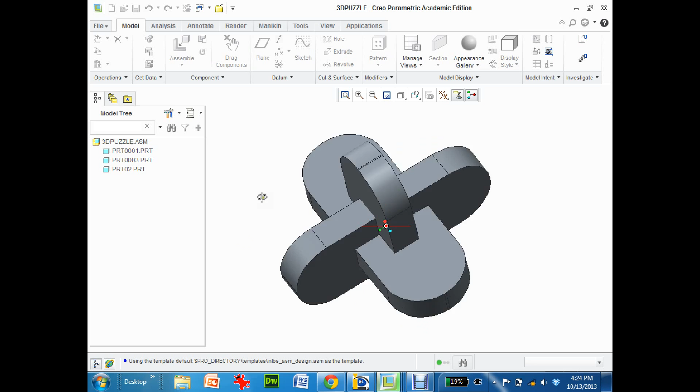This is part one of a tutorial that's going to have you create this 3D puzzle. What will end up happening at the end is you will output this 3D image in Creo to the laser engraver so it's actually physically in your hand.

To begin, we have to start off with what it's going to look like, or the dimensions of it. Here in progeCAD you can see these are the actual dimensions of each piece. So what you're going to do is go into Creo and make each piece.

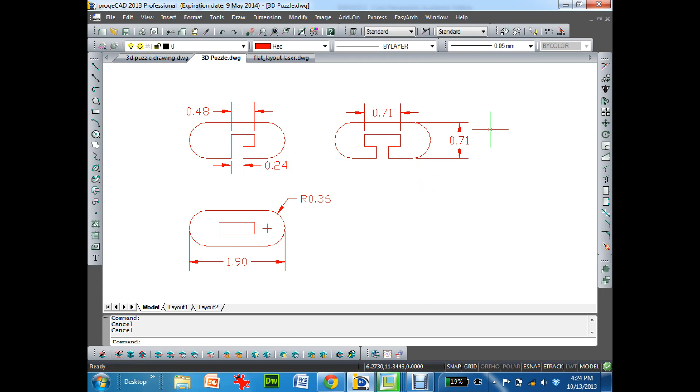Now there's a couple little tricks. To start off with, here's my first piece, and I've drawn it out, no different than any other drawing in Creo. But the next two pieces basically revolve around the same shape, so I don't need to redraw each one from scratch.

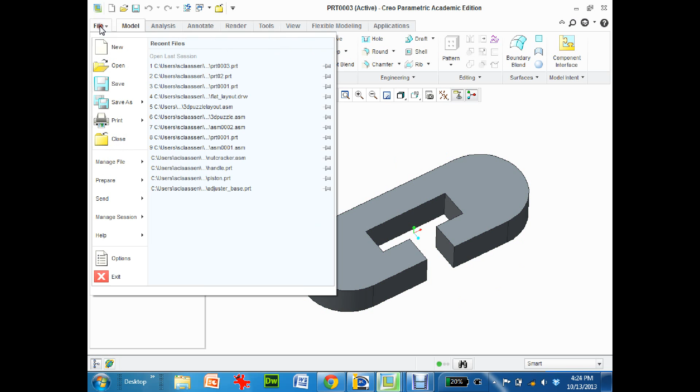What I can do is go up to File, Save As, and Mirror Part. Under Mirror Part, instead of mirror geometry only, I want to mirror geometry with features, and that allows me to modify it afterwards.

I'm just going to leave it as a default as Part 8 right now. So I click on OK, and now this is the second part. You can see up top here it's Part 8.

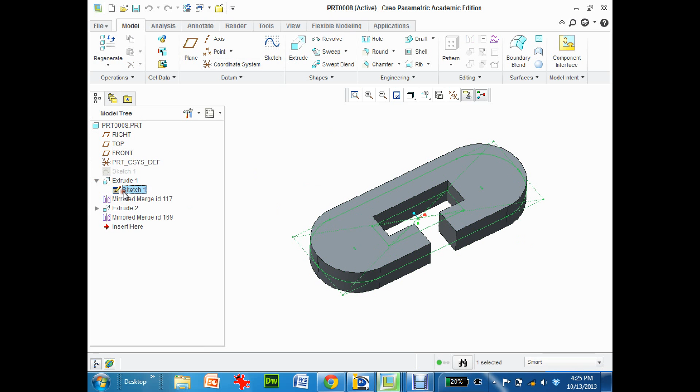Now I can go into it, hit Sketch, right mouse click, Edit Definition, and now I can go and add different features to it. So for example, if I wanted to modify the whole opening or something, or change other things, I can go and do that as well.

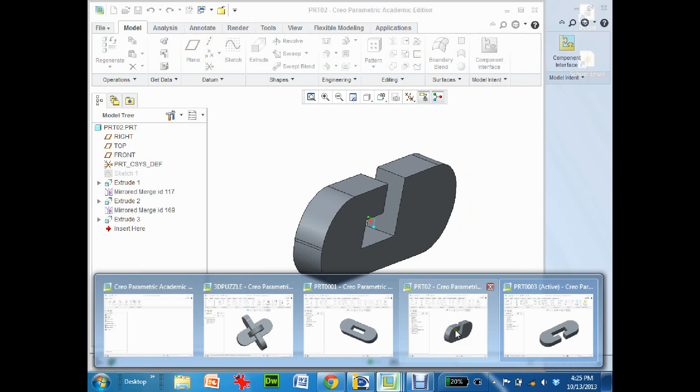So anyways, that's just one way of doing things. Once you've saved it, I'm actually going to close this one off. Once you've got all your parts, there's my first part, there's my second part, there's my third part. So all my parts have been created.

Now what I want to do is assemble them. It's pretty simple, straightforward assembly, and when they're all together it'll look like this.

Now that my model's done, my three parts are made, what I need to do is put them in such a way that I can actually get them to the laser engraver, because right now if I try to put this to the laser engraver it's going to look kind of funny.

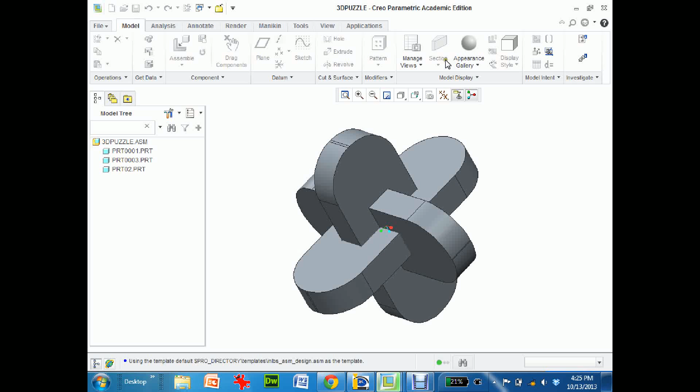So what I do is I actually start a whole new part. I take this, and from here I'm just going to start a new assembly, and I'm going to call it puzzle underscore layout. So this is just the layout for the puzzle.

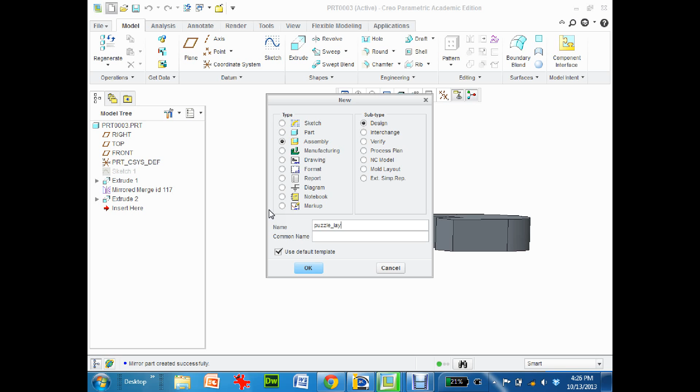I click on OK, and now I'm just going to assemble each part. So there's part 1. I'm going to go into, instead of automatic, just go default to position, click OK, scroll out a tiny bit, go to assemble, part 2.

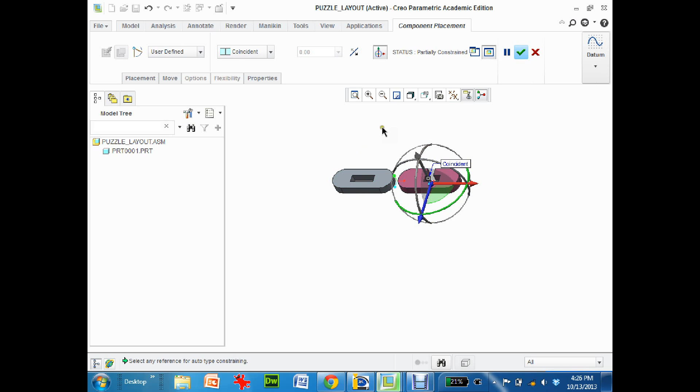All I'm going to do is just have the coincidences so the two line up. I don't think it really matters. Click on OK, and finally assemble part 3.

All I'm making sure is that they don't touch. So click on that one, and all I've done basically is just lined them all up so they're just in a line now. Once I've done that, I can just save it.

I'll save it as puzzle layout, and we'll go from there. So I'm going to stop right here. That's part 1 of the tutorial, and I'll pick up in a second.